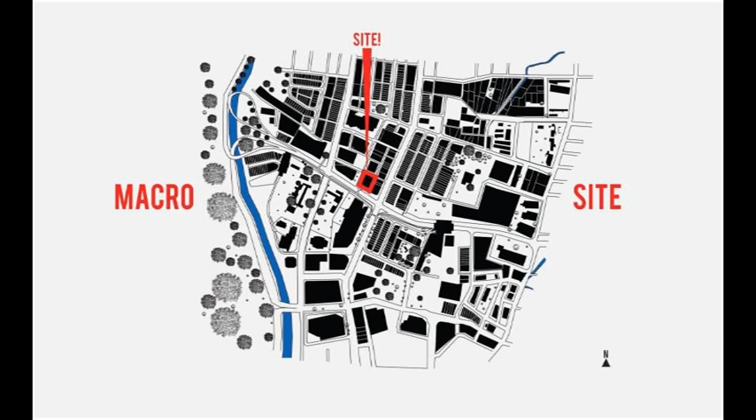Located on Jalan Sultan Ismail between Jalan Tunku Abdul Rahman and Jalan Raja Laut, our site stands at the raw entrepreneurial heart of the city. It is located near three rivers: Gombak River, Sungai Bunus, and Klang River.

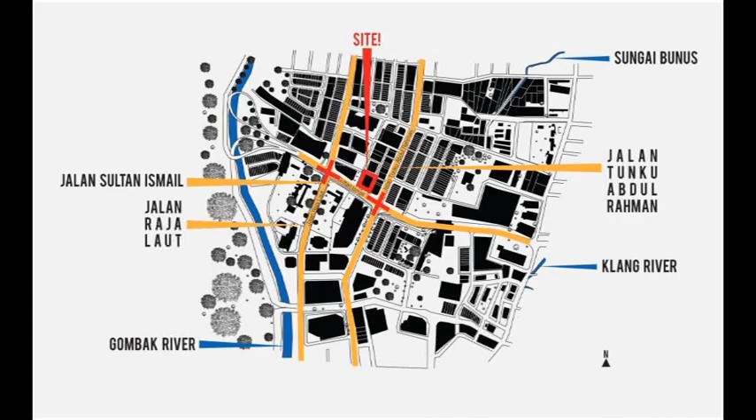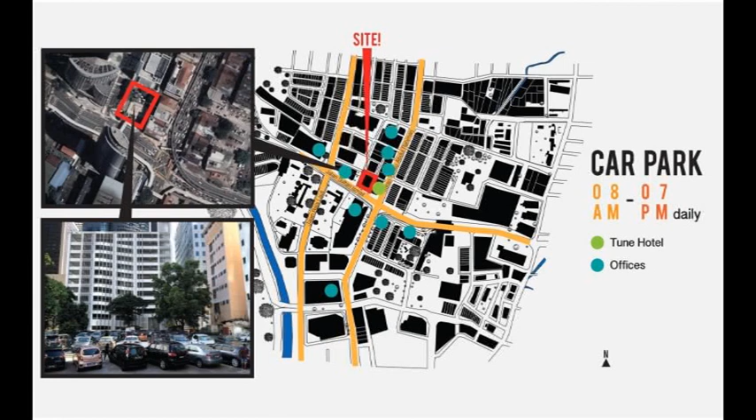Our site functions as a car park that operates from 8 a.m. to 7 p.m. daily. It serves as a parking area for Tune Hotel customers as well as white-collar workers from nearby offices. The area of our site is 1,700 square meters with no setback requirement other than the Kaki Lima.

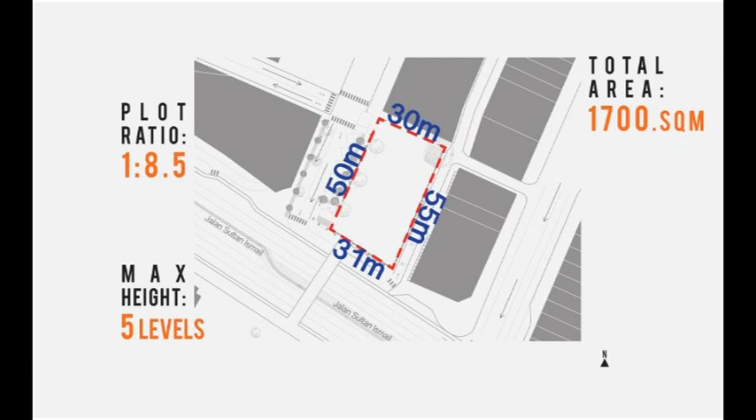The plot ratio for our site is 1 to 8.5 with a total buildable height of 5 levels. Our site's ground level is higher than the primary road, Jalan Sultan Ismail. It is the same height as the curb.

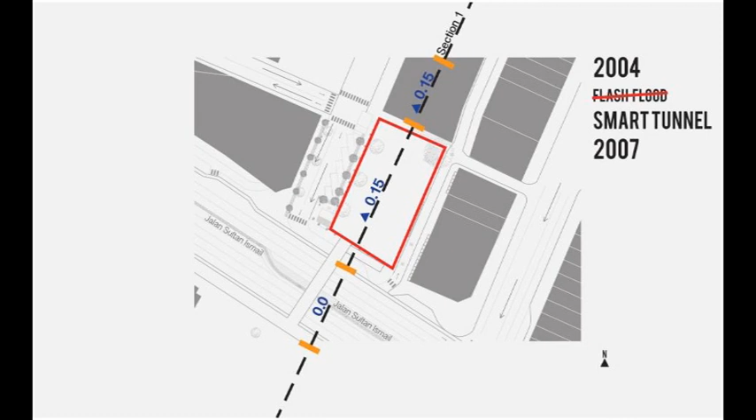Back in year 2004, the area was prone to flash flood, but the issue was later solved by the completion of Smart Tunnel in year 2007.

Our site is home to both formal and informal planting. Formal planting to the east is by DBKL and consists of common name of Swietenia macrophylla and Khaya senegalensis, with average diameter of 600mm to 1000mm and average height of 15 meters to 30 meters. These types of trees are normally used for city landscape as they grow fast and have a wide crown.

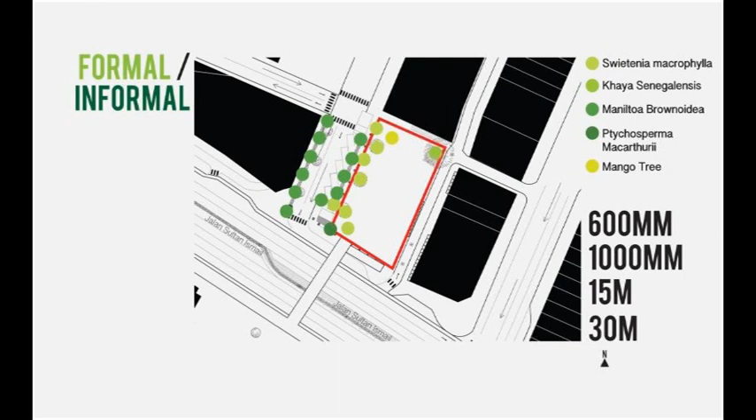Informal plantings such as mango trees were planted by the locals that stay on the site.

Within our macro site, several bus stops can be found nearby. This could be the reason for the existence of a public toilet located next to the Liberty Tower. It is designed for pedestrians and cyclists.

The site is also surrounded by lampposts and spotlights behind the Tune Hotel. Although all lampposts are facing out from the site, our site still receives a fair amount of light from surrounding light sources at night.

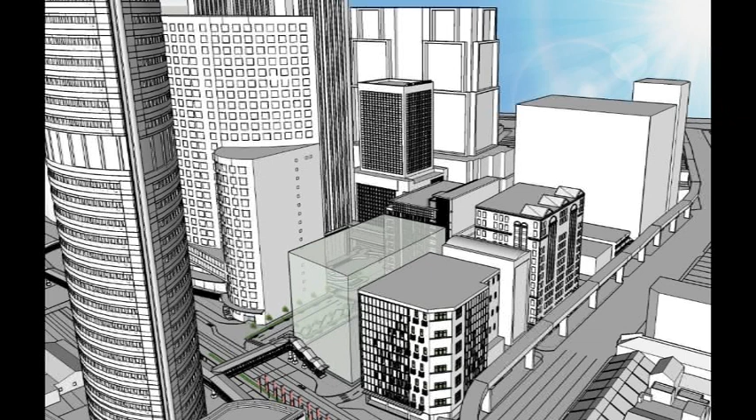Our site is surrounded by high-rise buildings and trees except for the southeast, which faces Jalan Sultan Ismail Road. Therefore, it benefits from passive shading, more so from east, north, and west, as buildings to the south are located across Jalan Sultan Ismail and so further away. Direct solar heat gain is therefore limited to noon hours to evenings.

It is noted that reflective surfaces are part of existing high-rise facade treatment. This has detrimental impact to microclimate as it directs heat to the ground and neighboring buildings. For example, from 8 a.m. to 10 a.m., JKG reflects heat and sunlight to the site.

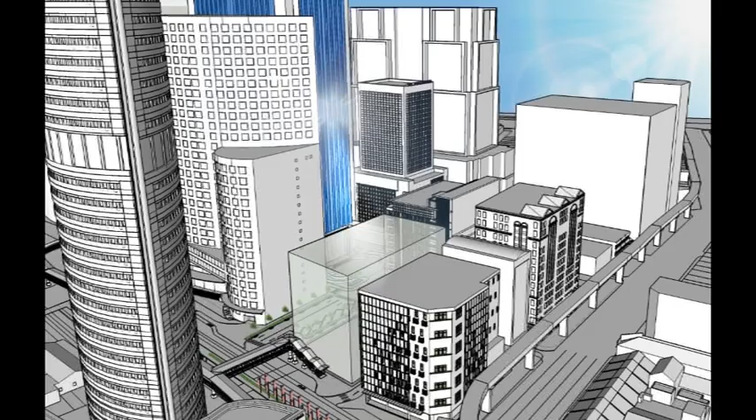The simulation chart showcased the spring equinox 21st March, summer solstice 22nd June, and winter solstice 22nd December. The spring equinox is where the sun is at the median angle to the horizon, resulting in median days and median shadows. Sun is received by the north facade.

During summer solstice, the sun travels far from north at its highest angle to the horizon, resulting in longer days and shorter shadows. Similar to spring equinox, sun is received by the north facade. The site is at its brightest at 12 p.m., in comparison to spring equinox where it appears partially shaded due to neighboring buildings. Also noted, light still penetrates the site at 6 p.m.

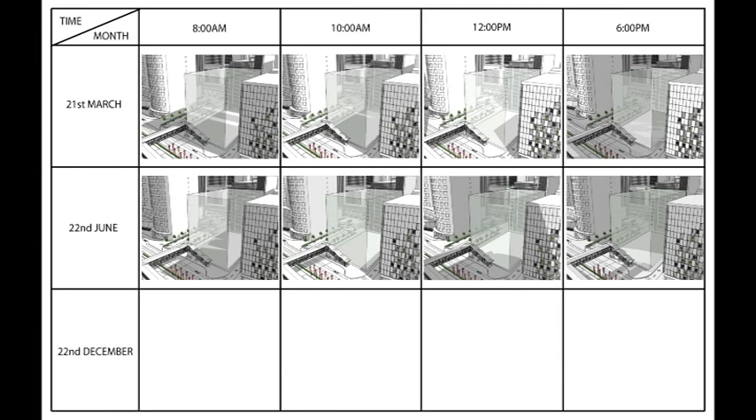During winter solstice, the sun travels south at its lowest angle to the horizon. This results in shorter days, longer shadows, and the south-facing side receiving sun. At 8 a.m. it is relatively shaded, appears brighter by 10 a.m., and shaded again from 12 p.m. onwards. Another contributing factor to the minimal sunlight received is the high-rise building located on the south towering over the site.

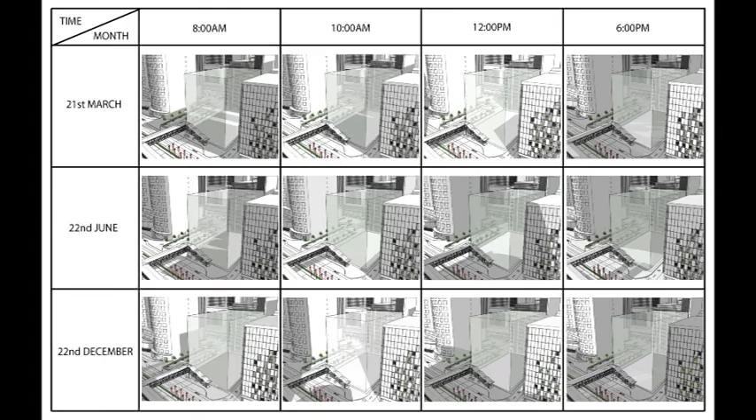Wind flows from southwest to northeast at an average speed of 6 km per hour, providing sufficient air movement to our site. With that said, rainfall generally follows the direction of the wind. The average temperature of our area is approximately 26 degrees Celsius with a humidity ratio of 0.008 and a relative humidity of 38%.

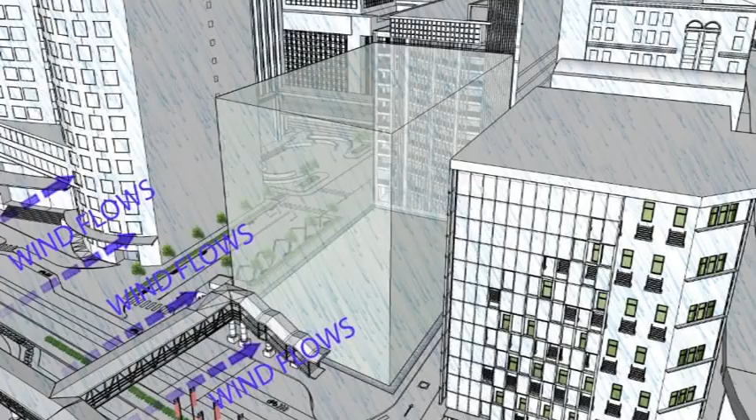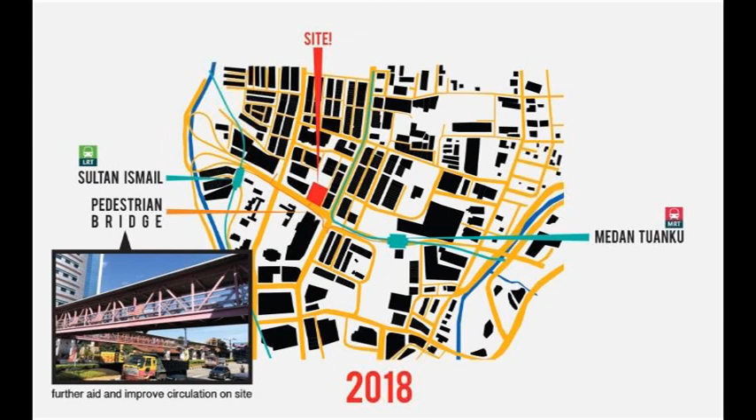In year 2018, building masses are seen to be arranged in a more uniform manner and in a larger scale. The public roads have seen to be connecting the accessibility of the city. Other than that, LRT, MRT paths, and pedestrian bridges are introduced to further aid and improve circulation on site.

In conclusion, development has absorbed all green space between Gombak River and Klang River. It went into a cycle of construction, demolition, amalgamation, and reconstruction, and now it's going through another cycle, which is the opportunity to design and build.

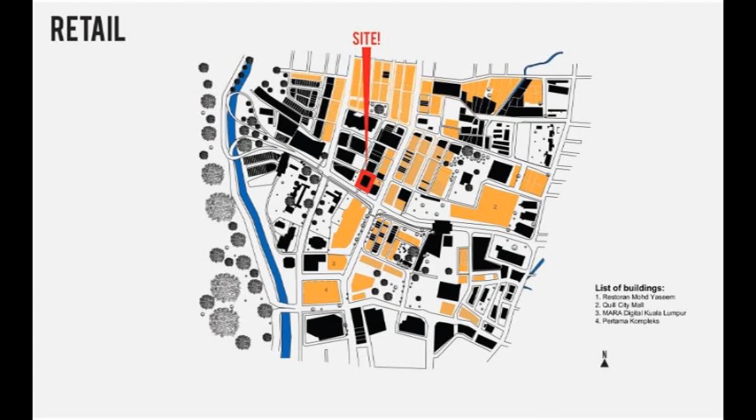The land use on site seems to be dominated by retail, restaurants, and shops lining the roads. The most significant ones are Restoran Mohd Yaseem, Quill City Mall, MARA Digital Kuala Lumpur, and Pertama Kompleks.

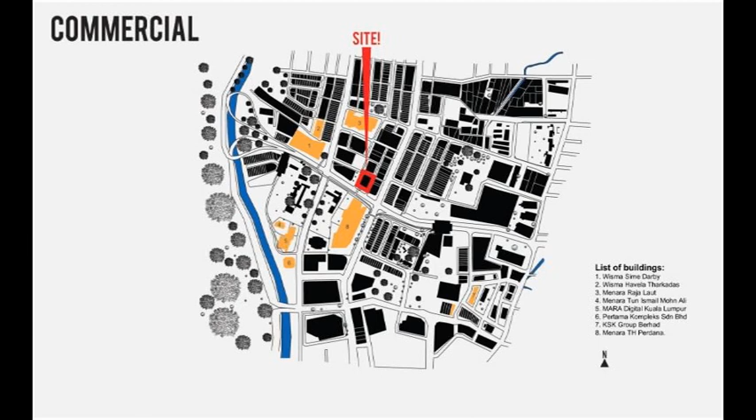The site is slowly developing into a commercial area as the number of office towers increases. These office towers would later become local landmarks on site, for instance Menara TH Perdana, Wisma Sime Darby, and Menara Tun Ismail Muhammad Ali.

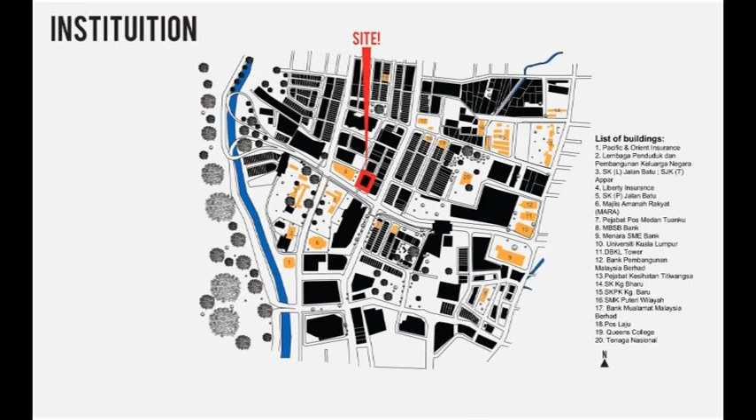As the population continues to grow and populate the area, institutional buildings are built to fulfill the needs of the local community. They can be categorized under public and private institutions. For public institutions: Bank Simpanan Nasional, Balai Polis Chow Kit, and Pejabat Pos Medan Tuanku, as well as schools from primary to tertiary education, which are Appar Tamil Primary School, Sekolah Kebangsaan Perempuan Jalan Batu, and University Kuala Lumpur.

As for private institutions, they can include CIMB Bank, Liberty Insurance, and Queen's College.

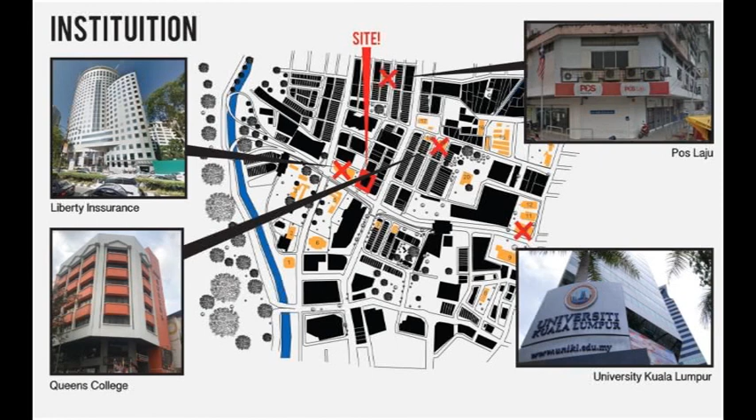The area is also a nest for the hospitality industry as it is located near Kuala Lumpur City Centre, a well-known tourist attraction. A number of budget hotels can be seen throughout the site. There are also prime hospitality brands such as Grand Continental Hotel Kuala Lumpur, Prescott Hotel, and Sheraton Imperial Kuala Lumpur.

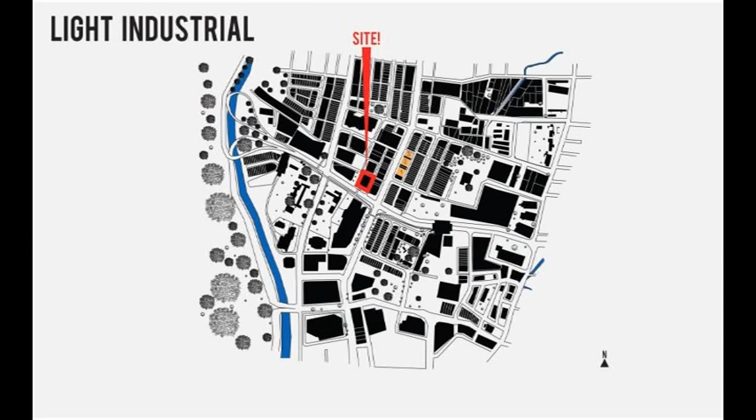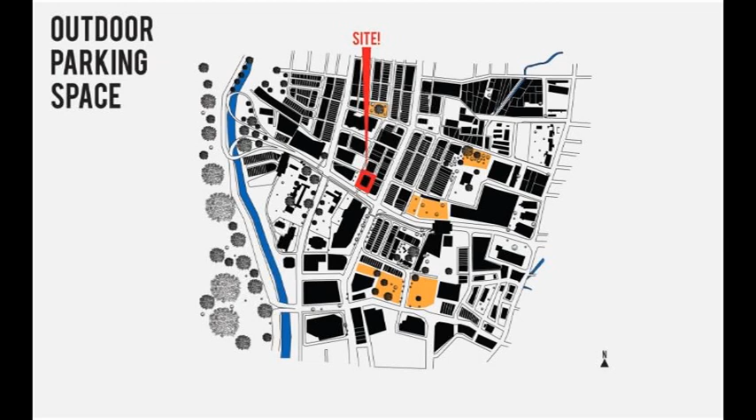Other than that, there are a number of light industrial uses in the area in the form of vehicular repairing workshops. Some of the lands are abandoned and later used as open parking areas. This is due to high car park demand from public users, higher profit to operate, and open parking space requiring lower maintenance costs.

The planning of land use on site is uncomposed, as there exists the placement of underdeveloped timber houses that are a stone's throw away from luxury condominium projects such as the Colony by Infinitum and Anggun Residence.

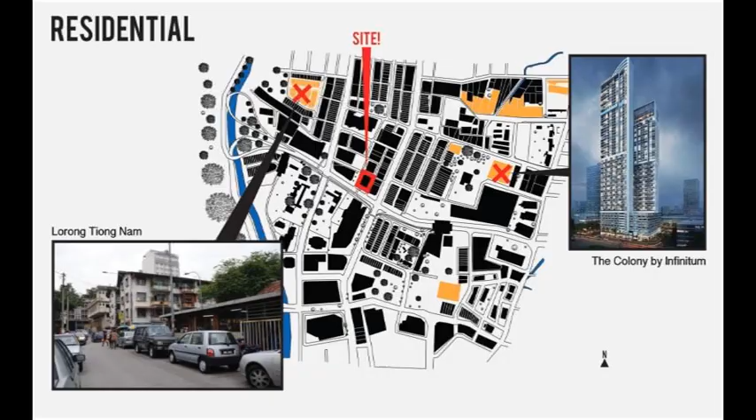Federal Territory of Kuala Lumpur holds 5.6% of it, around 1.8 million people, while 1.7% of it is from internal migrants. The reason people migrate out of Kuala Lumpur to other cities is caused by the desire to live in a different environment, to be closer to family, and to seek a better future and better opportunities in life. The population is estimated to reach 4.5 million in 2040.

The annual population growth rate is decreasing from 1.8% in 2010 to 0.8% in 2040. The average population growth rate decreases by 0.05% per year.

The age structure of the population can be categorized into three groups: young age 0 to 14, working age 15 to 64, and old age 65 and above. The percentage of old age is expected to increase significantly in future years, presumably affected by decreasing birth rates.

It is evident that the area consists of many office towers and shop houses that are unoccupied or of low occupancy. This could bring unwanted conditions to the site but could also mean that the site is available as an opportunity to be improved.

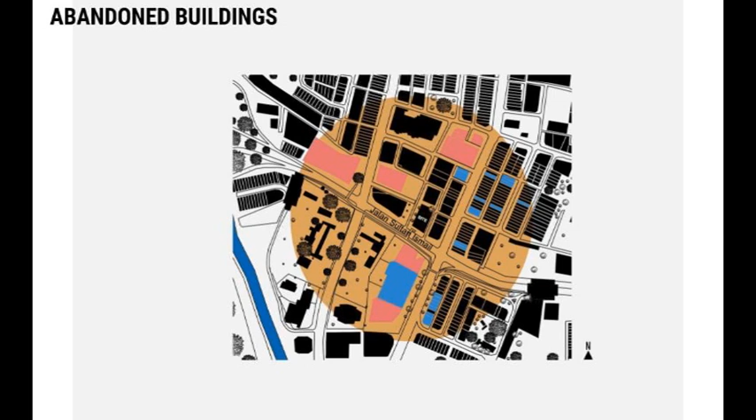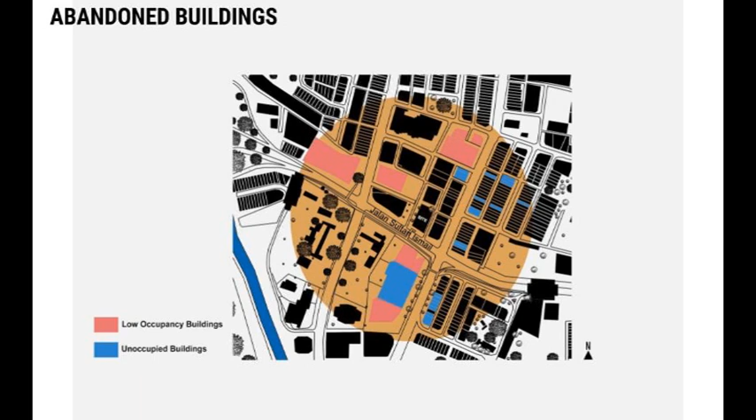It is expected that existing residential properties will amalgamate and become higher density residential developments. The function of the spaces is changing over time and will continue to change in the future. Therefore, buildings must look into longer use and short-term flexibility to maximize efficiency.

In the morning, most shops remain closed due to the fact that most of them operate from 9 a.m. or 10 a.m. Hence, there is not much activity going on in the morning for pedestrians.

During lunch hour, the majority of retailers, institutions, and commercials are already open for business. The reason is the business opportunity available from working individuals who will be looking for places to have their lunch break.

6 p.m. is a time when most of the population in the area leave, hence the streets and public transport will be busiest at this hour. Most shops would be closing down as well. However, some restaurants would be only beginning to operate from this hour.

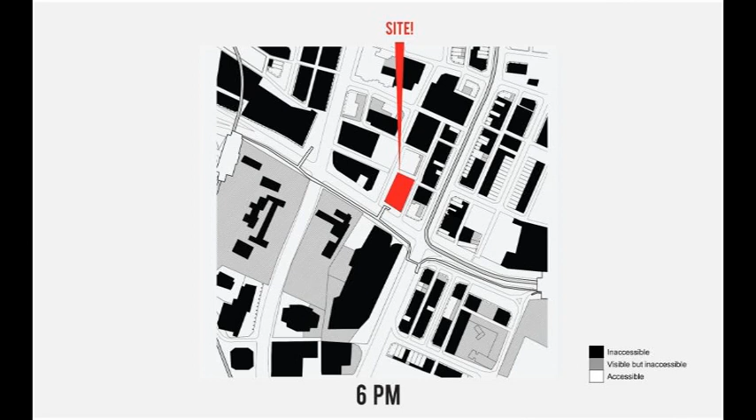We could observe the transition of the nature of the place from its day life to nightlife. Most shops would be closed by now. However, the place would be more vibrant than it was in the daytime, especially on weekend nights. Some of the most famous local food spots are responsible for this.

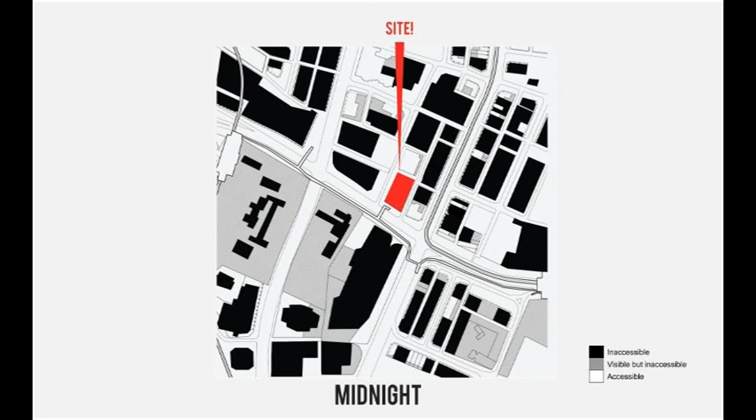Most people still wander around the area and spend time in public due to the lower temperature and available activities, such as the restaurants. This shows that our site never sleeps and has different energies and functions at different times, allowing it many potentials to be developed. However, any proposed design must be sensitive to this and synergize with these different energies.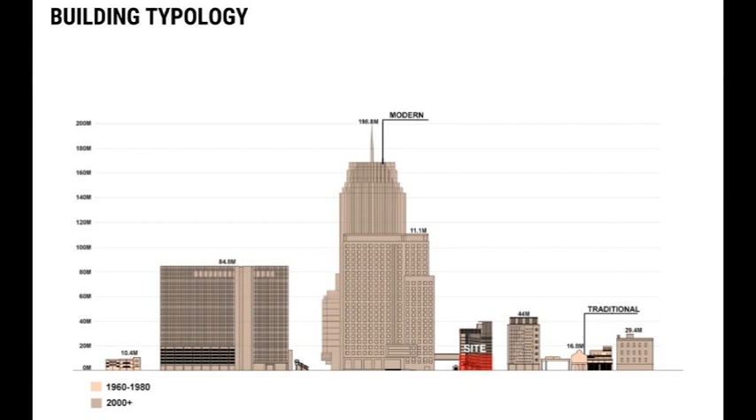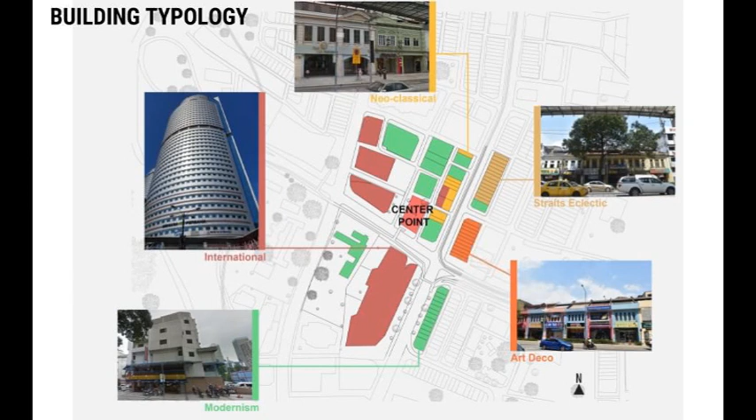In our site, there are modern-style buildings classified into international style and modernism. There are also traditional-style buildings such as Art Deco, Straits Eclectic, and neoclassical. Our site sits in the center of all these different styles, giving our building an opportunity to celebrate the diversity and richness of urban life.

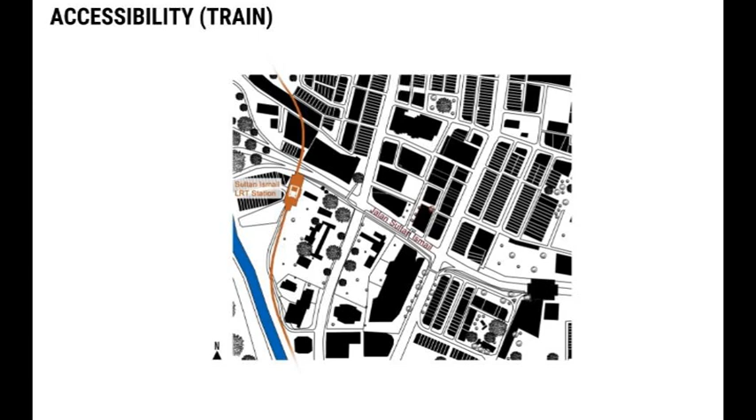Our site is accessible by means of public transport, including light rail transit (LRT), mass rapid transit (MRT), bus, taxi, and grab car service.

Sultan Ismail LRT station is located a 10-minute walking distance from the site, around the end of Jalan Sultan Ismail, standing between Sekolah Kebangsaan Lelaki Jalan Batu and Chung Kok Primary School. This station is an elevated Ampang and Putra Height Line station, connecting to PWTC and Bandaraya LRT station.

The MRT station, on the other hand, is located about a 5-minute walking distance from the site through the pedestrian bridge. This station serves as part of the KL Monorail and is connected to Chowkit and Bukit Nanas MRT station. LRT serves to allow accessibility to and from stations out of Kuala Lumpur, while MRT only circulates around Kuala Lumpur.

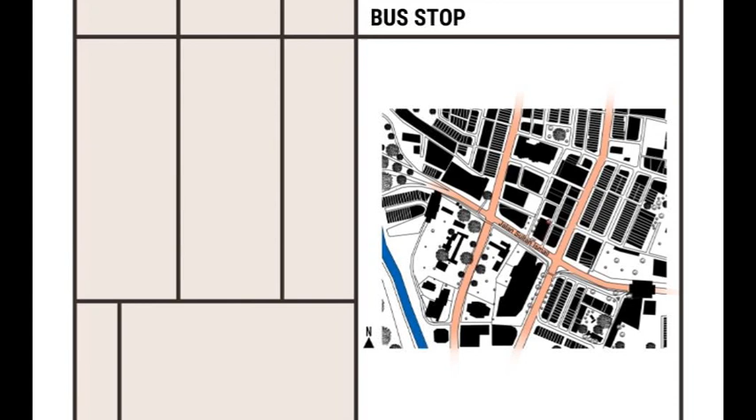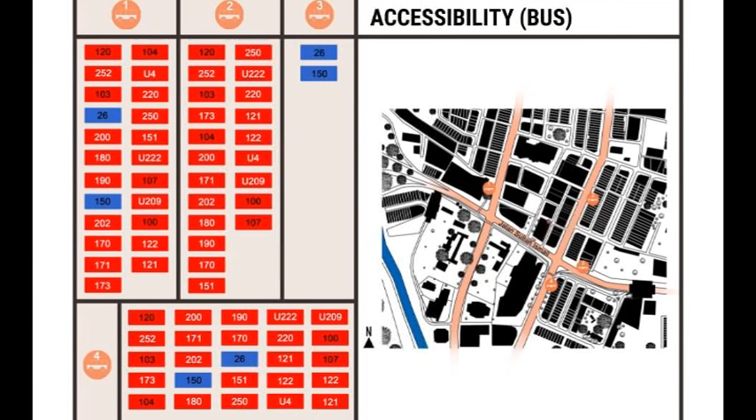There are 4 bus stops within a 200-meter radius from our site. These buses travel along the primary routes around our site. Public transport accessibility on site can be concluded to be well connected to other stations and places on and off Kuala Lumpur City. This provides an opportunity for our site in terms of public transportation accessibility, allowing users to navigate to our site from existing stations with ease and without hassle.

There are mainly 3 primary routes on site: Jalan Sultan Ismail, Jalan Raja Laut, and Jalan Tuanku Abdul Rahman. These 3 primary routes provide accessibility to and from our site to other areas. Each road is made out of 4 to 5 lanes. The remaining routes are secondary routes with 1 to 2 lanes. The arrows on the diagram point out the direction of the road.

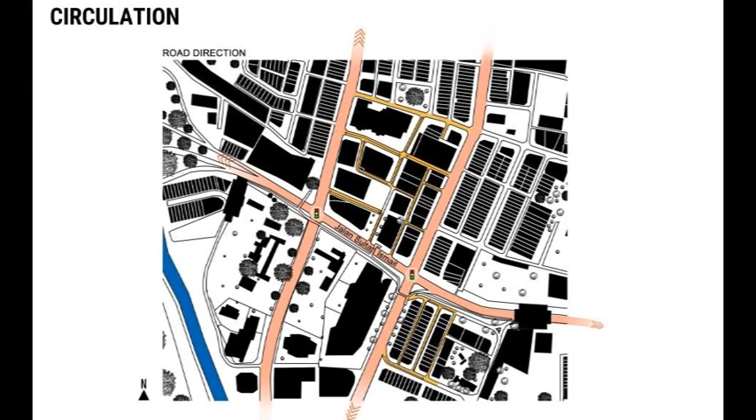Bicycle lanes are installed in front of our site for cyclists to travel throughout the site. There is also an elevated pedestrian bridge built to link the MRT and LRT stations with our site, helping keep pedestrians safe from undesirable conditions while traveling to and from our site. Our site can easily be accessed not only by vehicles but also by pedestrians nearby.

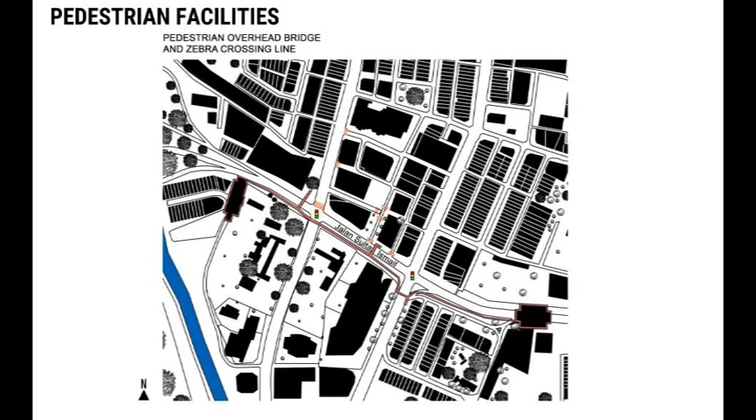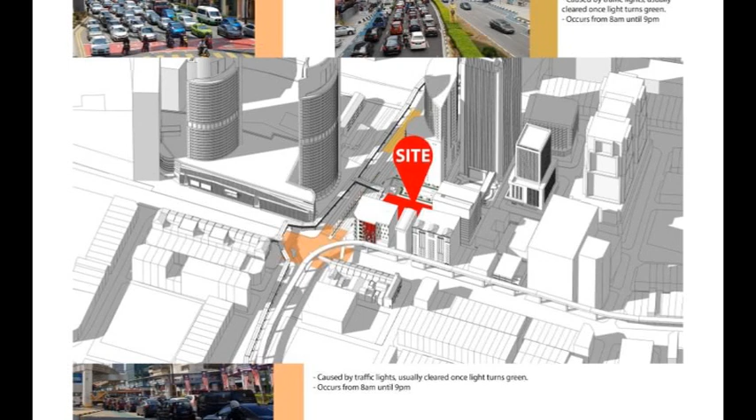The vehicular nodes in the area are very straightforward. They mainly occur at traffic intersection points, caused by traffic lights. There is a constant temporal node that clears when the traffic light turns green and occurs when the traffic light turns red.

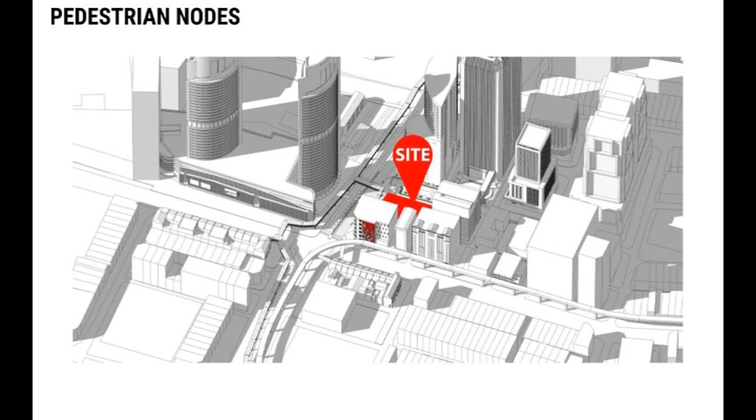For nighttime, nodes can be found at the RSMY Best Cheese Naan restaurant, which occupies the 5-foot walkway of 5 neighboring shop lots during its peak. Another node occurs at the Laman Sultan Ismail signage, where empty space during the daytime becomes host to many food stalls at night, coming alive with the help of busking performances.

Along the street, another node can be found: the Thai boat noodle stall, which only opens at night and is not uncommon to see customers lining up to dine. Further down the same street is the Nasi Kandar restaurant called Mohd Yaseem, also responsible for one of the nodes, with most customers taking away their orders. It is safe to conclude that food is the attraction for the population at night.

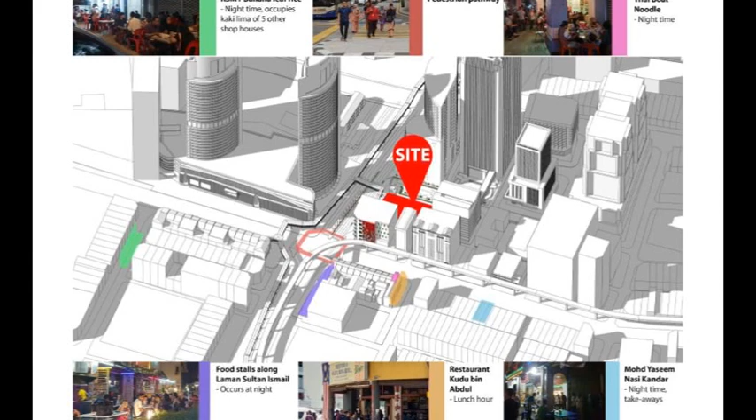This also proves that the area has nightlife status and is sometimes more interesting to visit at night than during the daytime. There are a few recognizable buildings that stand out on site.

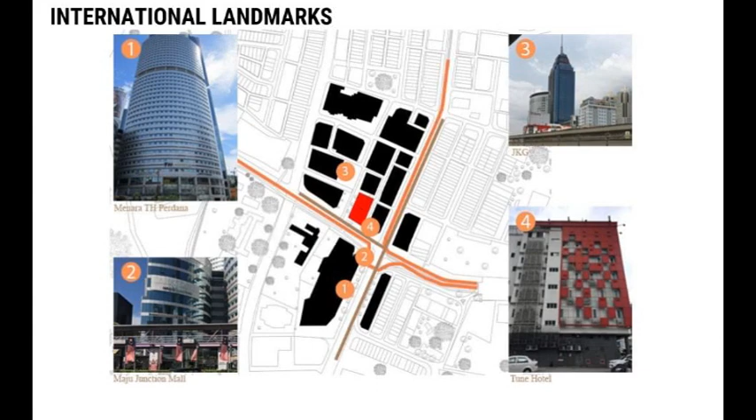The international landmark is none other than the JKG Tower, which stands highest among our site. Menara TH Perdana and Maju Junction Mall, opposite our site, come second in terms of height and distinctiveness, both being second tallest and having non-traditional form compared to the buildings around them. Within a few steps away is the famed 8-story Tune Hotel, with its striking facade color and design.

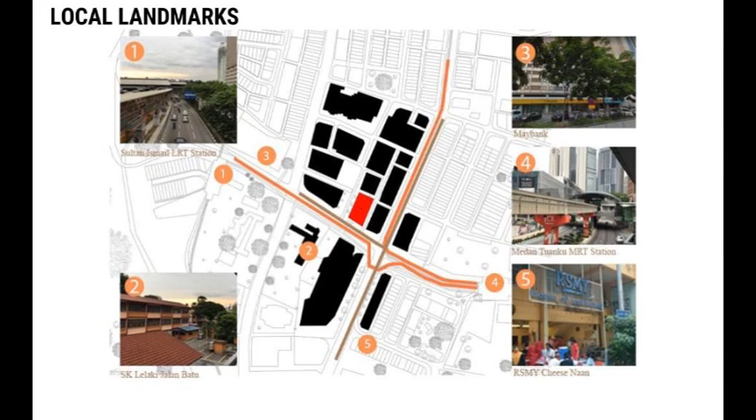The 2 most noticeable local landmarks on site are the 2 train stations: Sultan Ismail LRT station and Medan Tuanku MRT station. Maybank, SK Lelaki Jalan Batu School, and the hotspot RSMY Best Cheese Naan are a few more local landmarks. Surrounded by these prominent landmarks, pedestrians are able to look out for reference points to navigate to our site.

Nice vistas of the city are interrupted at some points, such as the cityscape opposing our site being partly obstructed by the elevated walkway, which also prevents public visibility into our site. Another visual edge in front of Tune Hotel, within walking distance from our site, is intercepted by the MRT route from Medan Tuanku Station, halting the field of vision from Menara TH Perdana to the immediate opposing side.

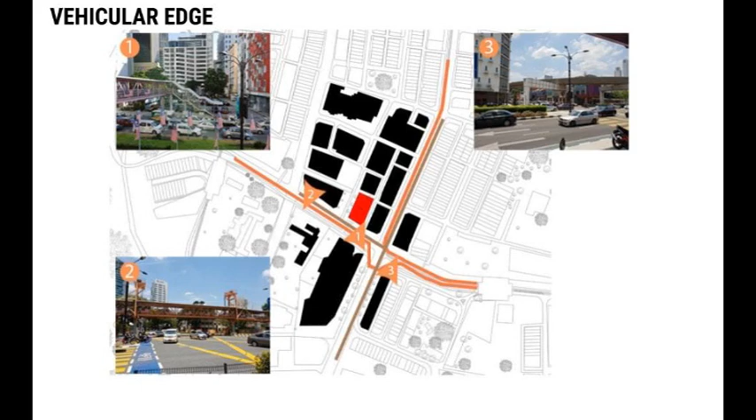On the other hand, Jalan Sultan Ismail's elevated walkway becomes an edge when it blocks the site from either side of Jalan Raja Laut. There are a few elements within the set radius bordering the path of pedestrians. The 2-way road with 4 lanes along Jalan Sultan Ismail acts as a disconnector, making it an edge.

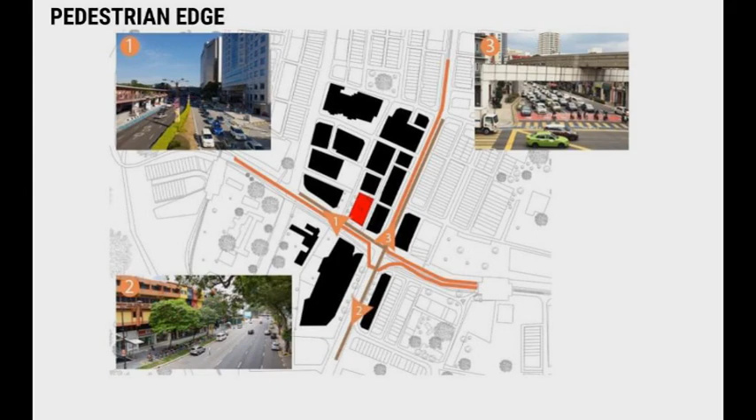Jalan Tuanku Abdul Rahman divides both sides with a one-directional 4-lane road where elevated walkways are absent, creating difficulty for road crossers on the other end of Jalan Tuanku Abdul Rahman, opposite our site. A 5-lane main road becomes an edge when there is no presence of an elevated walkway or other pedestrian walks.

In reality, cities are designed based on the people who live there. Too much ordered city can become dull, while too much irregularity can become annoying, hence their vision brings cities back to health.

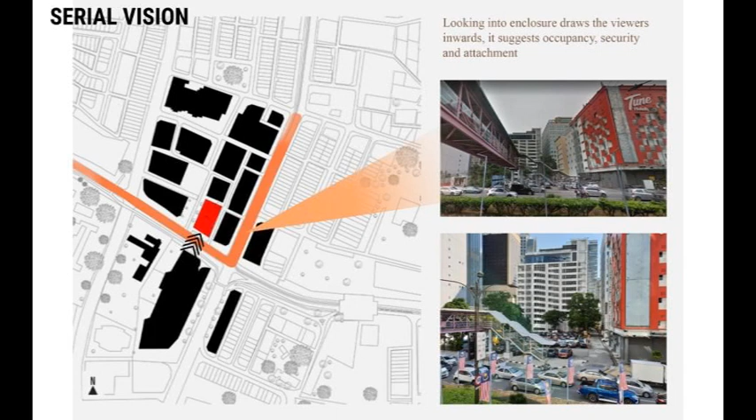Blocked by the elevated walkway, the view into our site is interrupted. Looking into an enclosure draws the viewers inwards; it suggests occupancy, security, and attachment.

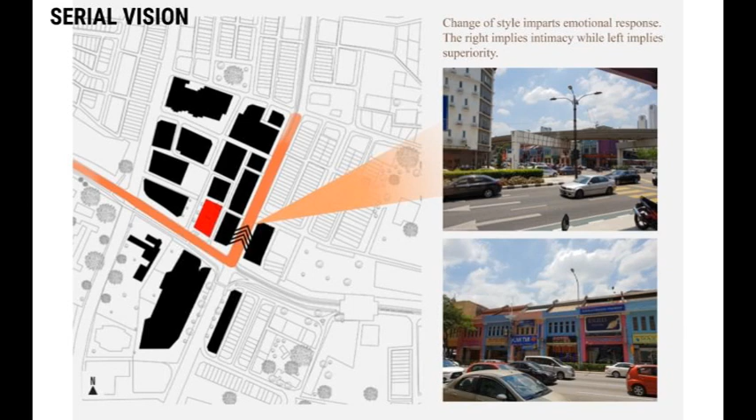With one side of the building being modern, opposing the other of quaint, the change of style imparts an emotional response. The right implies intimacy while the left implies superiority. With the dissimilarity of building styles on both sides and the obstructed view of the cityscape by the elevated walkway, it is not a sight for sore eyes.

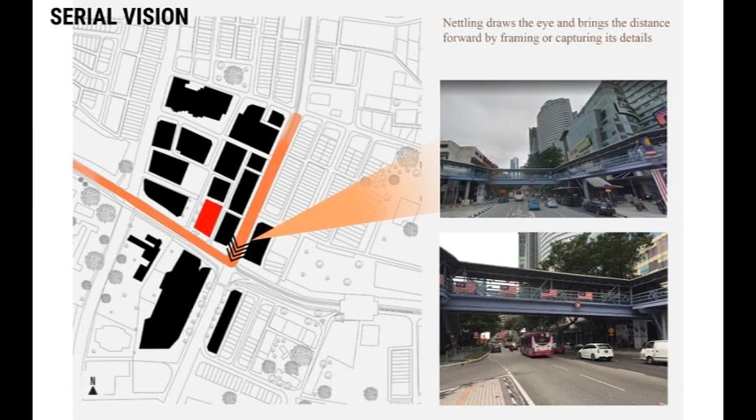However, nettling it draws the eyes and brings the distance forward, framing or capturing its detail. The limitation of vision creates a closed vista which increases the sense of being here. This is a common and valuable tool for creating intimacy.

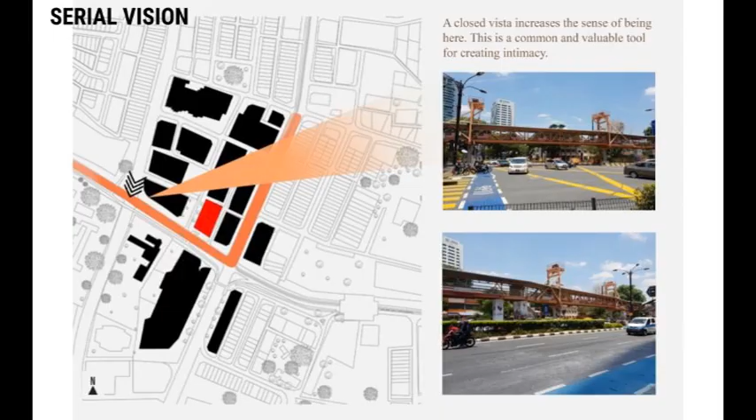Within 500 meters from our site, there are hardly any activities or events being held throughout the year of record from September 2017 to August 2018, as our site is not the most flourishing area. Nevertheless, there are sprinkles of events happening within the 500-meter radius.

A weekly event started when a group of teachers and professionals with a mission to provide free education to children and the working poor of Chow Kit. Hence, Buku Jalanan Chow Kit was formed in 2015 and is still going on at 8:30 p.m. every Sunday.

To support the Go Green campaign, KL Car Free Morning is formed, happening every fortnight on the first and third Sunday of every month, where roads are closed for participants to cycle, jog, skate, and walk. Besides KL Car Free Morning, Jalan Sultan Ismail is included in two routes of other events, namely Howei Chow Kit Run and Yayasan Run.

Being one of the largest wet markets in town, the Chow Kit Wet Market food tour was started to take visitors on a street and culinary tour.

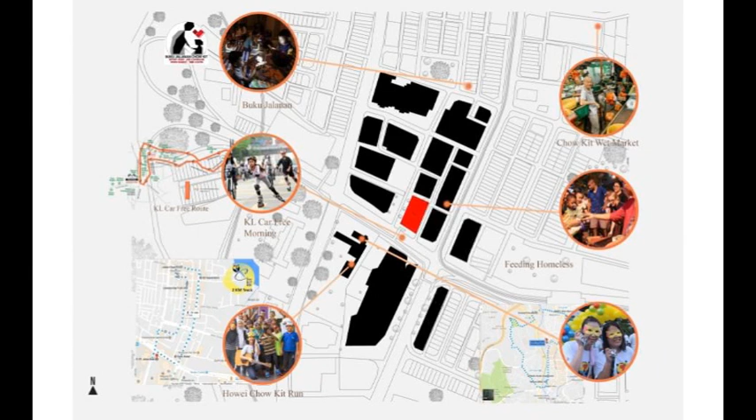Not forgetting the people in need, Pertiwi Soup Kitchen set up an organization to feed the unfortunate on the 8th of July and has been distributing food to approximately 700 homeless and poor individuals 4 times a week. These are the locations of the events and activities held in the set radius around our site.

Our site is not at all perfect. It is flawed with some issues that go unnoticed unless carefully observed. The first problem would be construction debris seen near the existing public toilet, because the area is secluded, hence people could take advantage of it and leave debris on our site.

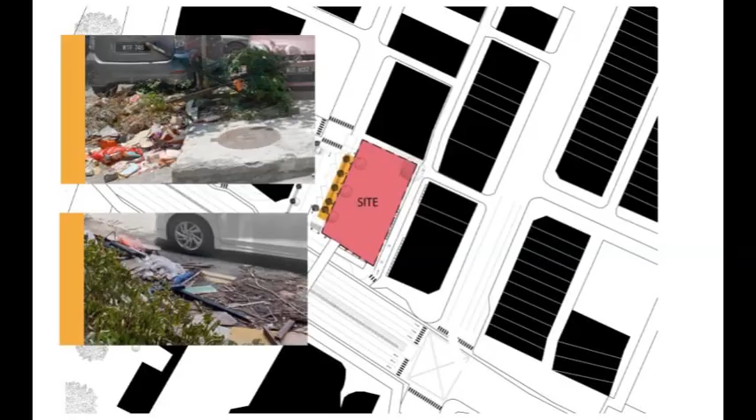Next major issue would be the homeless community in the area. They can be easily spotted wandering around or sleeping on the streets. The homeless community consists of both adults and children, which is why we must not turn a blind eye on this matter. Our site could be an opportunity for developments to cooperate with homeless feeding activities by communities such as Community Heroes and Pertiwi into our co-working space. This could organize the structure of events and improve food waste issue management.

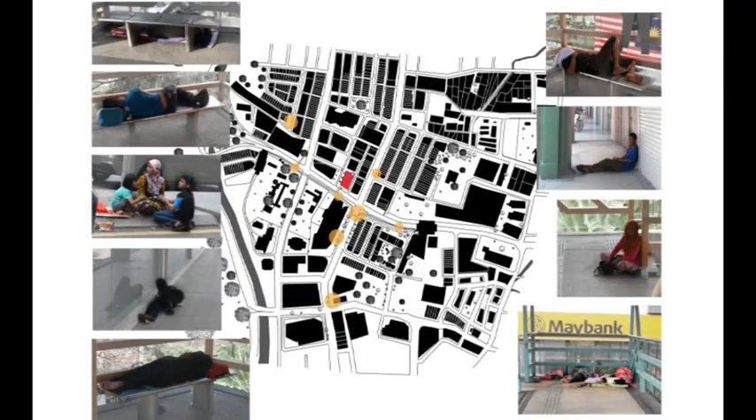Located in Bangsar, APW was first established in 1952 as Art Printing Works, a commercial printing factory. Art Printing Works was a well-known brand in the printing industry from the 60s to the 80s. APW came into life in the year 2014; it stands for A Place Where.

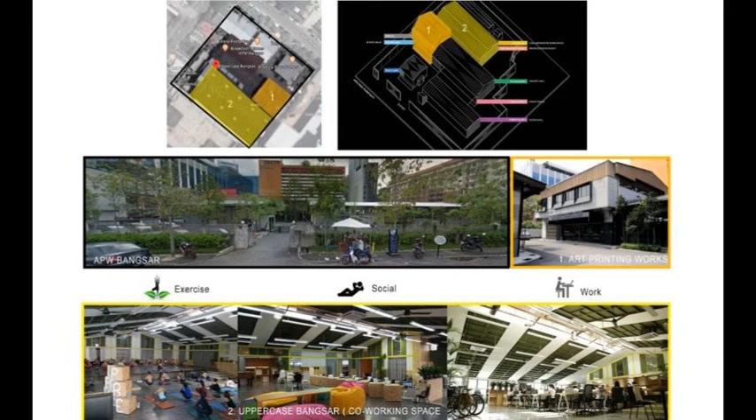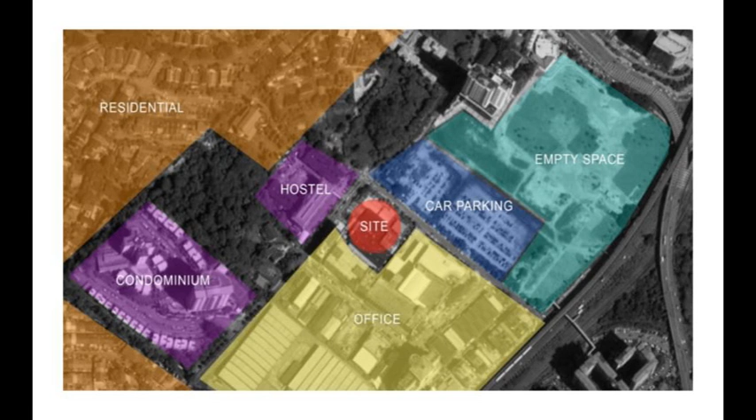The purpose of this reformation is to utilize the space within the printing factory. It houses a variety of spaces such as a printing factory, collaborative workspace, food and beverage, event space, and pocket parks. The core of APW Bangsar is to bring people of different backgrounds together to encourage a creative culture, hence the users range from professional car racers to housewives.

Started back in 2013, Brooklyn Boulders Somerville is a rock climbing space that merged fitness with art, music, technology, co-working, and events. Out of a total 40,000 square feet, 28,000 square feet is climbing space. Other than rock climbing, it provides other fitness programs such as yoga classes, fitness training, co-working space, a hangout lounge, and community events.

Brooklyn Boulder's BKB aims to bring diverse groups together to forge a cohesive, vibrant community. Blurring the line between work, life, and play is the ultimate goal for BKB.

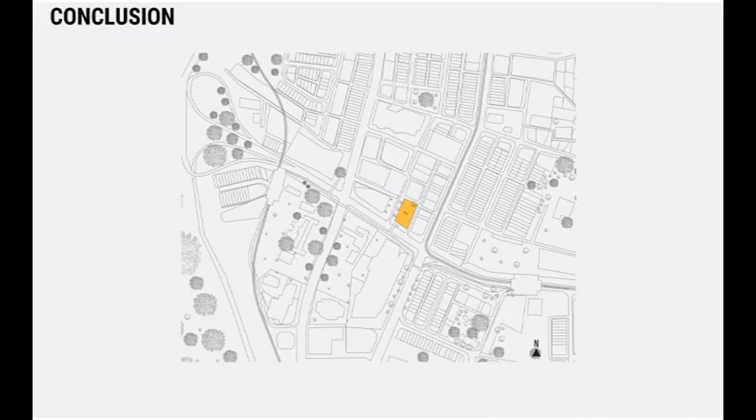Situated between many different nodes of transport such as LRT, MRT, primary roads, bus stops, and taxi stops, users of these transportation forms would have no trouble navigating to our site without compromising their safety.